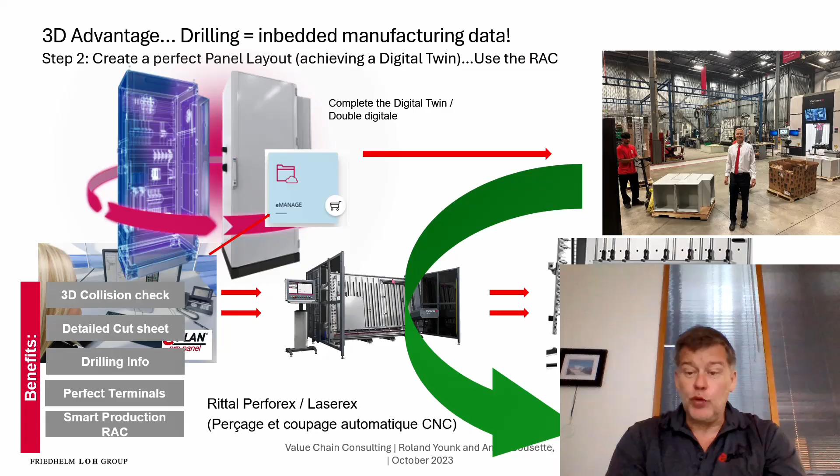Hello. As you know, I always love to talk about the Pro Panel and how we can use the pre-drilling advantages of our RAC, or even if you have a Perforex yourself in-house, how you can manage to prepare the panels up front. Now, of course, this is easy because when you're using EPLAN, similar to just a shadow, the information is just contained inside the components which are placed inside the Pro Panel.

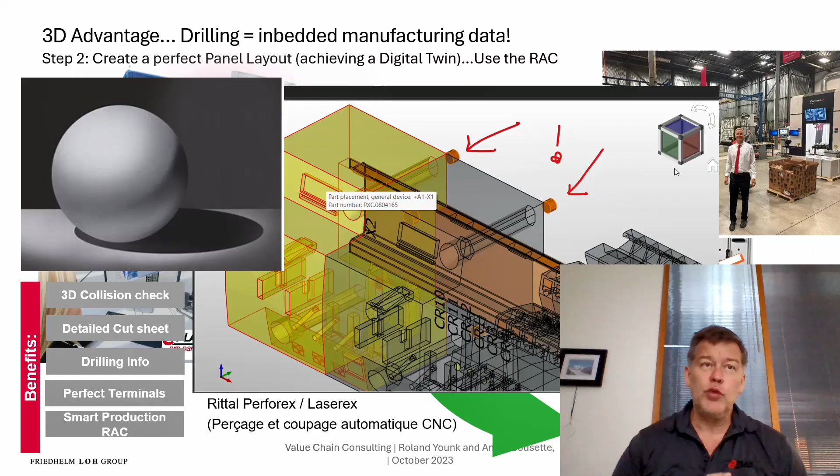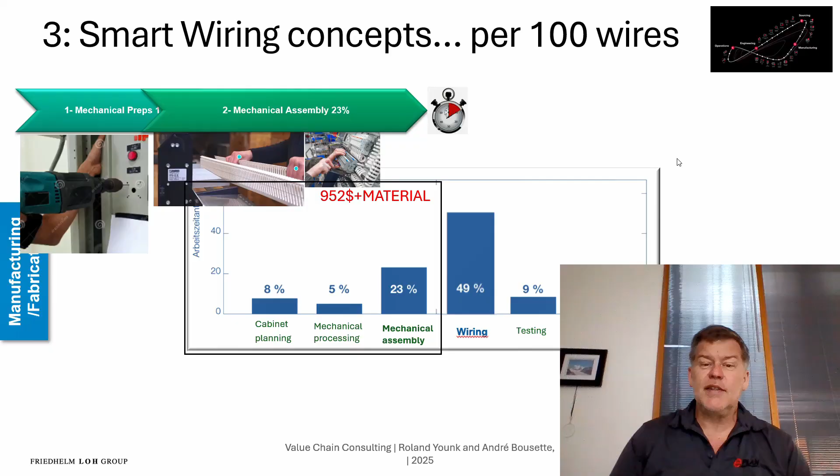So this can be done at any time. Just do the 3D, do your panel, and you can do the drilling. Now, a lot of people have seen me talk about the second step of your panel building, which is the smart wiring concept. Initially, you have to prepare and assemble the panel, which pretty much takes half the time. And the second half is the wiring portion. Unfortunately, the wiring portion takes about 8 minutes per wire on average, or 4 minutes per point.

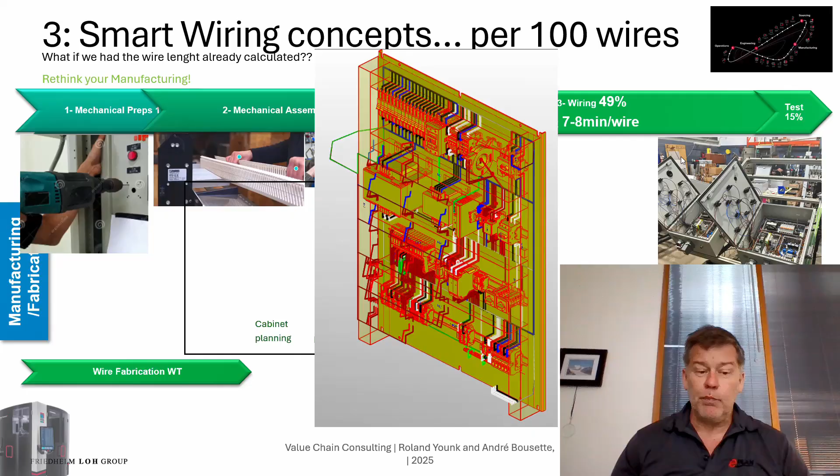Now, what if we could calculate the length of the wires? Typically, based on the schematics, we know the source and target, and then we can have the routing done inside EPLAN, which calculates the wire length, and then get the benefit of the prefabrication of the wire. So either you hire WP, wireprint.com, which will prepare the wires for you. You hire the Rittal Application Center to get the drilling done. And all you have to do on your side is the in-house assembly, 1 minute per wire, and you're done.

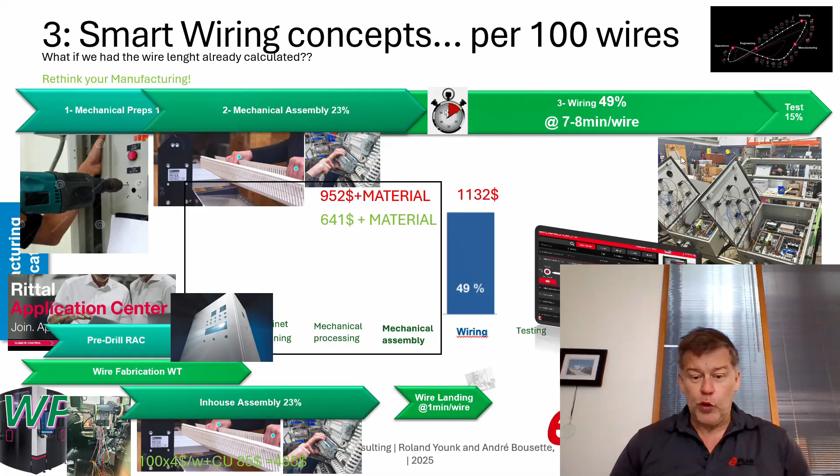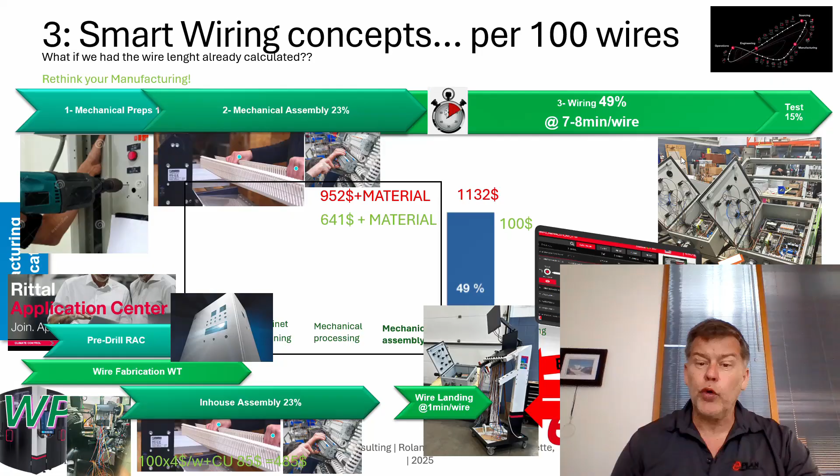The question, of course, is how can I do this if I do not have the schematics? Because you just receive some PDFs and some paper, and you have to do the job, but unfortunately you did not create the schematics in EPLAN. That's not a hurdle, because you have most likely heard about this thing here. When you do your labeling, you most likely will create an Excel sheet that you can import to print the labels.

Here, this is basically a simple Excel import into Project Complete to get your device tags and your wire labels. What I recommend is to use that same Excel sheet to actually define the wire. So read the schematics you receive in paper format or PDF and define each wire, source, target. In this case, I'm using the structure we typically know with the +F +A2 location. You don't necessarily have to use those, because this is to identify where the components are. And this is the entire source, target, color, gauge, and wire number.

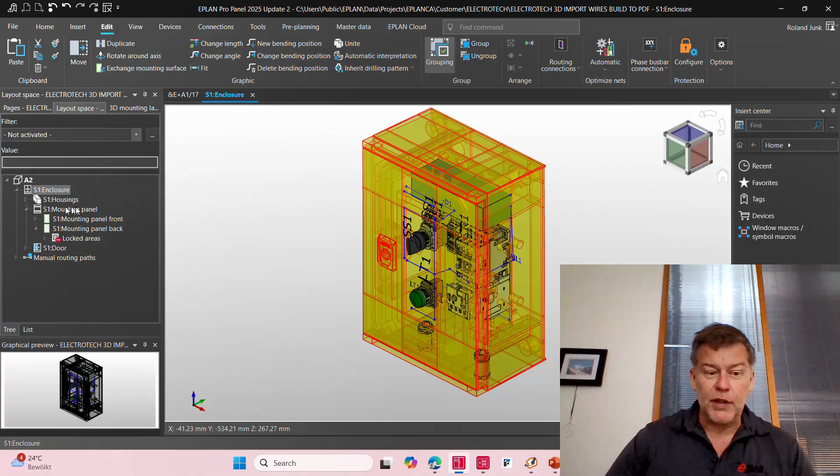And of course, this may take on average maybe 2 minutes per wire. You just fill out that sheet. So that's basically the Excel sheet. On the EPLAN side, because you want to use the Perforex, you create primarily the 3D graphics like this. And instead of just punching out the holes in the panel, you actually take the time to place all the components, and make sure that when you place them, because EPLAN will try to put a device tag behind it, you match the displayed DT, the device tag, to what you defined in the Excel.

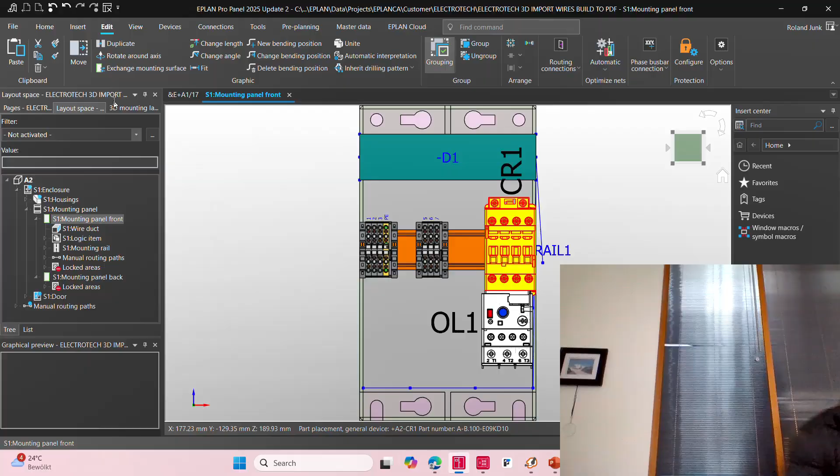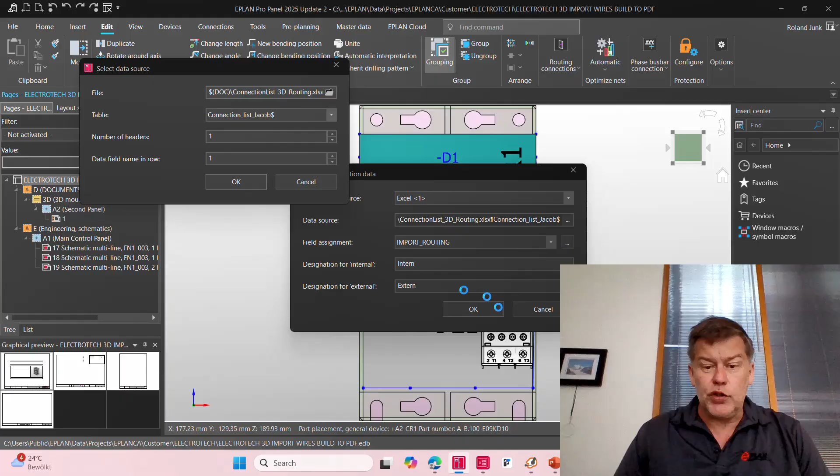Once this is done, EPLAN is good enough to just import that Excel sheet and do the routing. So here, we go to import, go down here to import routing connections. This basically calls up that particular Excel sheet that we just looked at. We just pick it up and call it up here. In the field assignment, there is the assignment of the source, the target, the color, the gauge, and the designation.

And what this does is basically just, boom, import the wires. So you just click OK here. It actually recognizes the ones that cannot be imported because of that +F. So of course, if you don't have any locations, it's even easier. You just define the ones that are inside the panel.

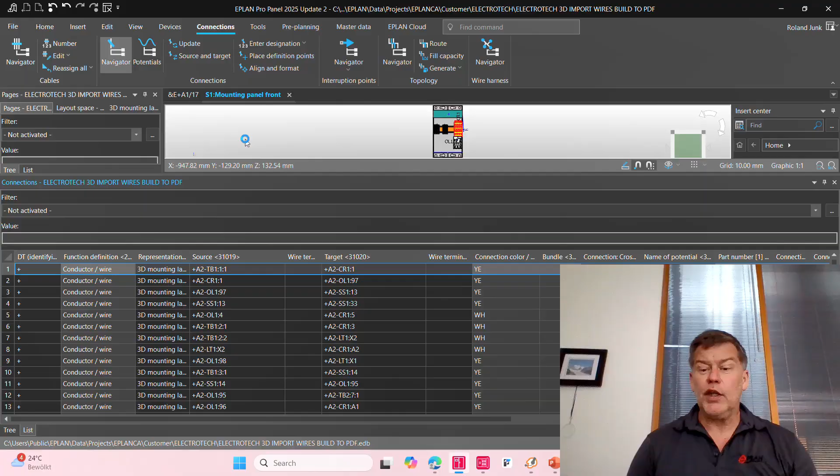And this is basically an interpretation of the previous schematics that you received. Now, this being done, you can actually see inside the connection list here, we will have the connection list without the length, of course. What I'm going to do is, in this case here, just take the routing. It's a little bit difficult here because I'm really using a lot of space for the navigator. Let's make it a little bit smaller.

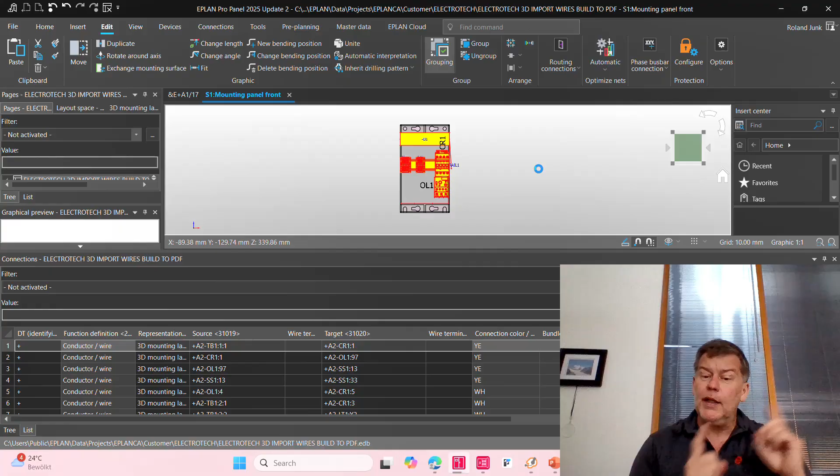And you know how the routing works. It's primarily just select the objects that you defined. It will look typically at the schematics here, at the imported list, and you can see that the wires are immediately listed here. Now, why isn't this one here listed with the length?

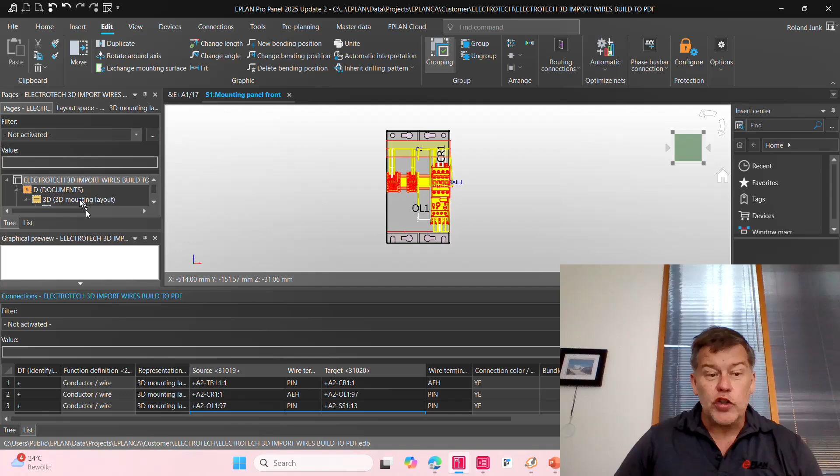Well, it's kind of easy because what happened is, in this case, we have to go to the door. This is the junction between two different items that are on the door. Unfortunately, I did not open it here. If I would have done the complete routing like this of all the components, the wire length would have been assigned to all of the imported wires.

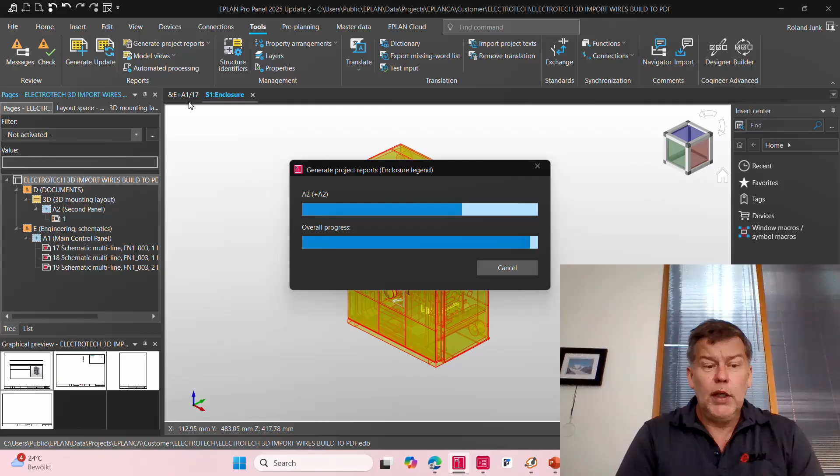And there we go. You have now a detailed wire list, which is nice because, as typically in EPLAN, we run the reports via the tools, generate project reports, and the project reports will generate the bill of material, including these wires, the components. It will generate all the lists for the fabrication for the individual steps, right?

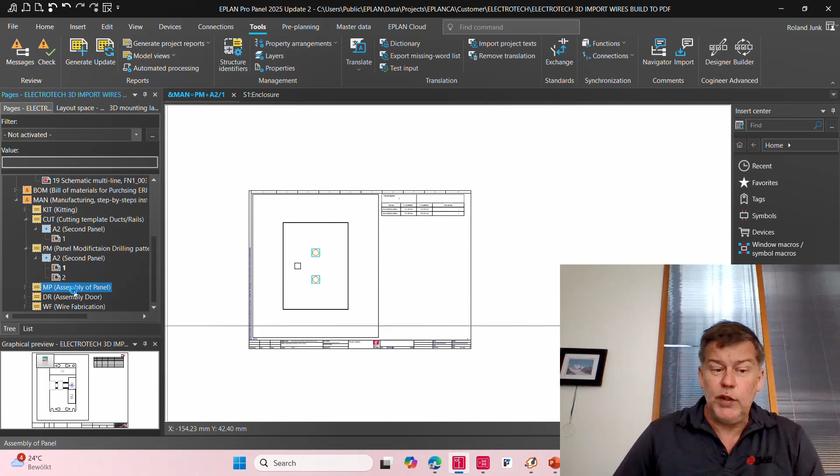So we have the first step, which is cutting the ducts and the rails. There we go. Then we have the panel modification, which is drilling, which of course can be done by RAC, Rittal Application Center, so you wouldn't even have to worry about this. The assembly sheet to assemble all the components. And here you will ideally have pre-drilled, in the clip project, all your devices. Then of course we have the same thing for the door again.

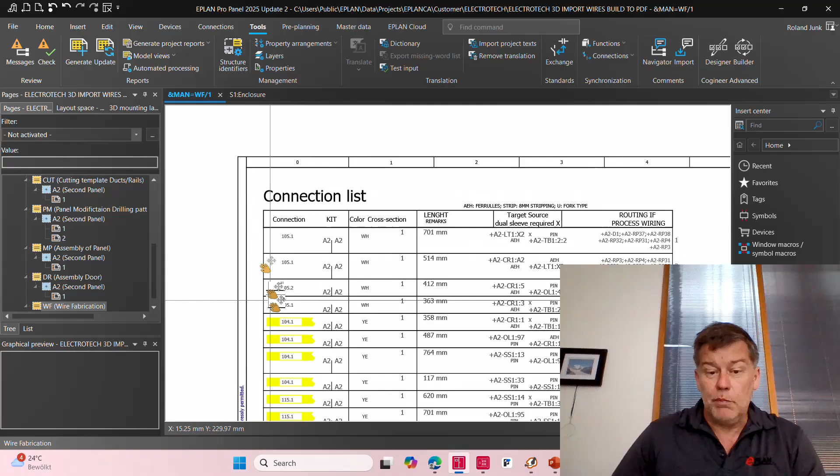And last but not least are the wires for the wire fabrication, which can be done manually in-house or by wireprint.com. If you don't know wireprint.com, this is a service that we offer here in Canada, and we pre-fabricate the wires. Now, when you look at this, it's a huge saving at the end of the day because the wires come prepared with source, target, and wire number. And the whole fabrication is done for you. So you get them actually before you have the assembly done.

It's a 48-hour delivery time. Depending on how the delivery is done, in Canada, it's a little bit bigger, so it may take 1 or 2 days to deliver it. But after 48 hours, the wires are actually produced and shipped out. And you can see the details here if you want to. Just go inside. This is the machine that actually produces them. And we even have a small calculation here on whether it's worth it or not.

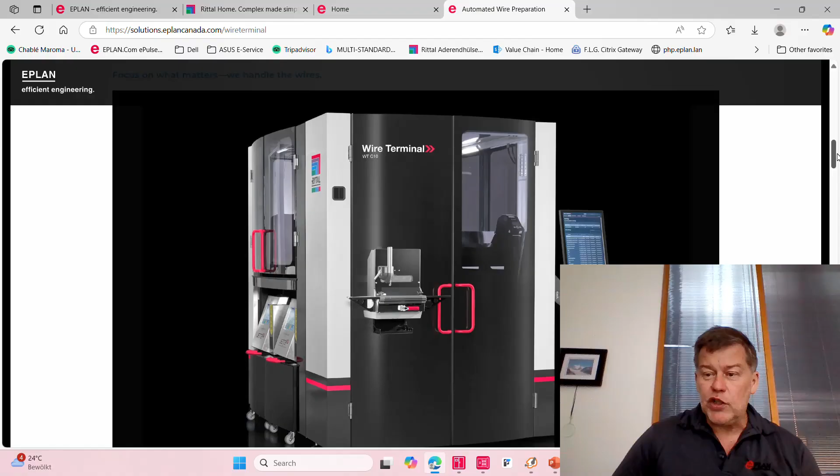The initial idea is, of course, to see how much time you take to prepare these wires, at a specific rate. So you may work for $75 an hour or $85 an hour. These are the opportunities and the time saving that are looked at. We produce the wires for way less than what it costs you to produce them. So we save on average anywhere between 5 and 7 minutes per wire. And you deliver much, much faster, and you keep a little bit of money in your own pockets. It's all calculated here. We can discuss this.

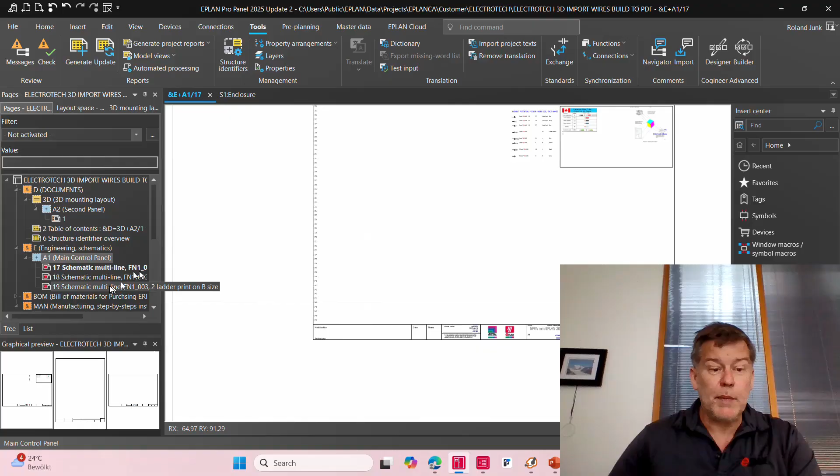So this was how you can still benefit from that service, even though your schematics are absolutely empty. You look here at this project, there is absolutely no schematic that was done. All we did is visually do the interpretation and create this small Excel sheet. Super easy, super, super easy.